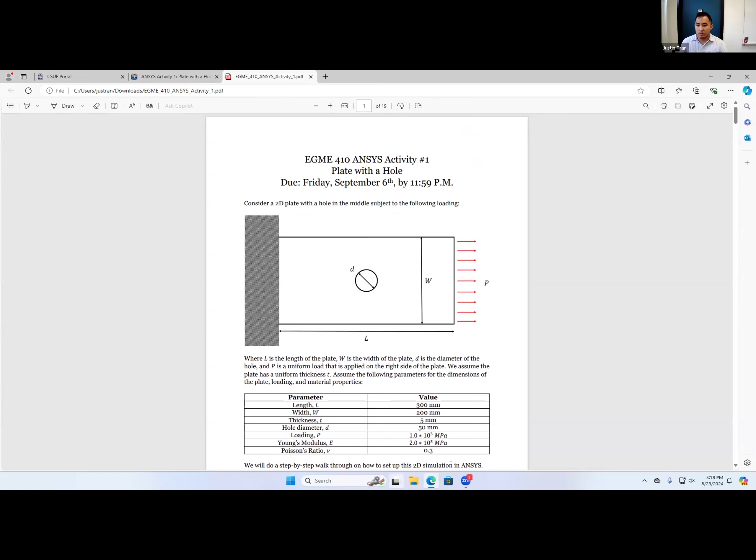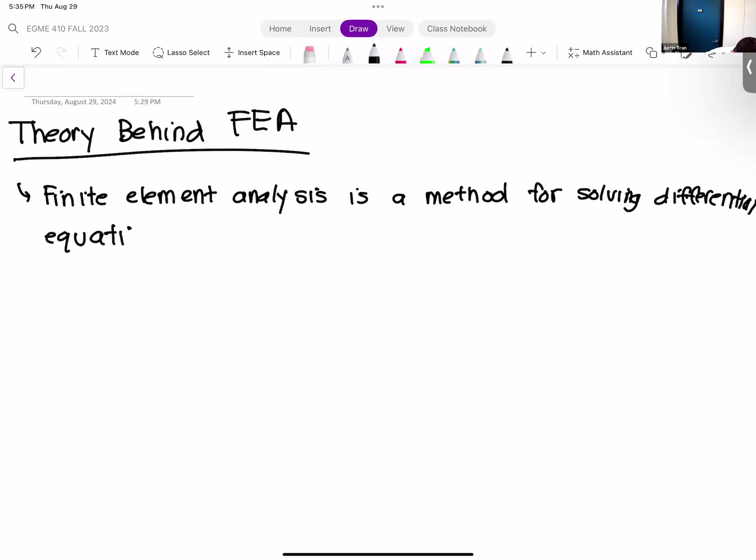If you take a course that's more in depth on the theory of finite elements, you're going to be talking about differential equations a lot. And the reason we're so interested in differential equations is, well, first let's define one. A differential equation is some kind of equation that relates the derivatives of certain quantities.

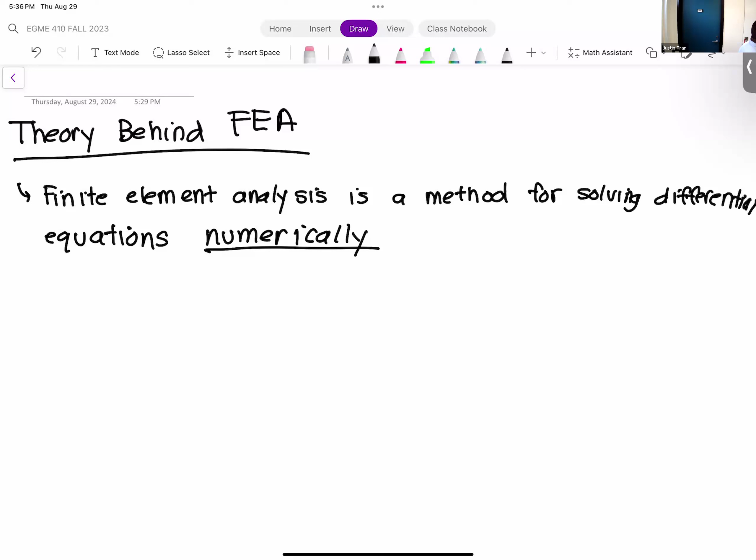It turns out that, based on the development of science and math throughout history, a lot of physical phenomena have their most reliable models as differential equations. So we talked about a few examples on Tuesday, things like the fluid mechanics equations, the heat equation. Things like that.

And the reason finite elements is able to do this is that it's able to take a differential equation, which is normally a very difficult type of equation to solve, and turn that differential equation into an algebraic problem.

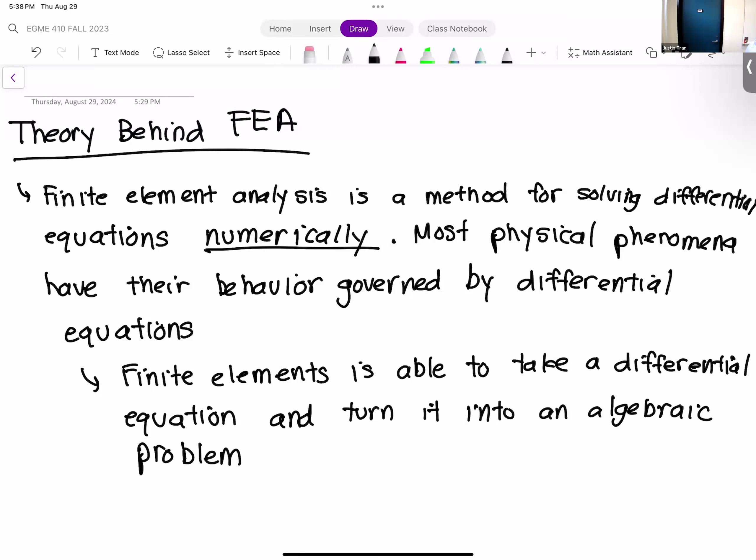Which, by itself, you'd say doesn't seem like that much of an improvement, right? You're taking one really hard math problem and turning it into another really hard math problem. So it kind of just seems like we're doing things for fun, right? But the thing with algebra and algebraic problems is that computers are actually really good at solving algebraic problems.

And so it's fascinating actually. If you look at the historical development of FEA, finite elements was actually developed long before the age of computers, right? It was developed by mathematicians as a way to take differential equations and put them in algebraic form. When it was first proposed, people almost scoffed at it.

It's like, this isn't helpful. You turned one math problem into another, big whoop, right? It wasn't really until computers started getting developed and showing that they were actually really good at solving these algebraic problems that finite elements started to gain traction from there.

And then one thing led to another, and programming became a big thing, and development of finite element codes became a thing. And now we have all these big companies like ANSYS selling their finite element software to people.

And so, because of this development, finite elements has become a really big part, a really important part of just engineering analysis and engineering design in general.

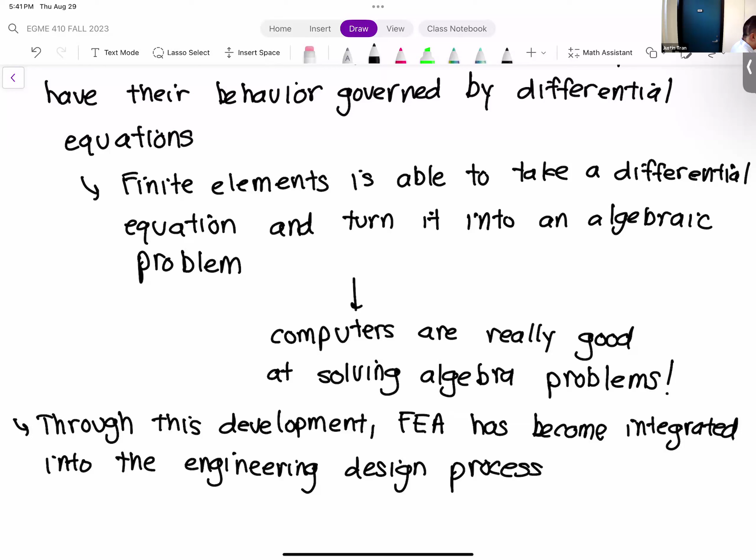And so the way that we obtain finite element results from a physical system kind of follows a particular flow chart, or it follows a particular model. So usually, when we are working with engineering, we're going to start with some physical engineering system.

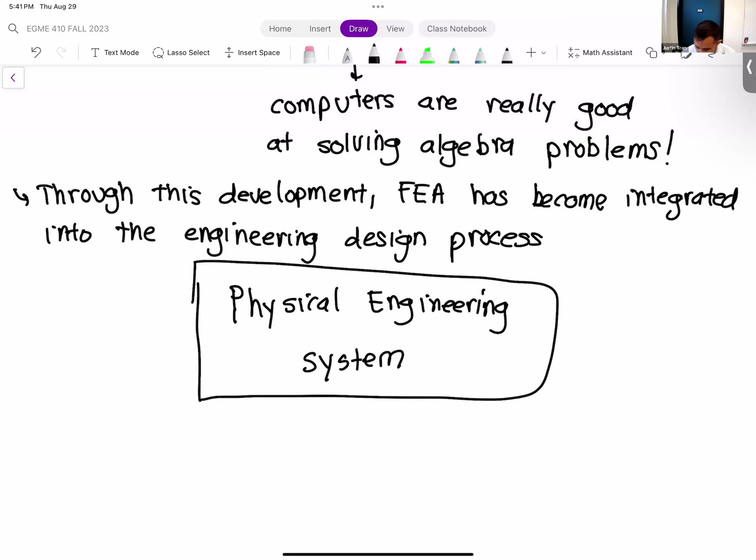Whether this be like a car or a building, usually it's something that you're in charge of designing as an engineer. This physical engineering system has its own governing equations, and the governing equations are going to be the differential equations that are used to model its behavior.

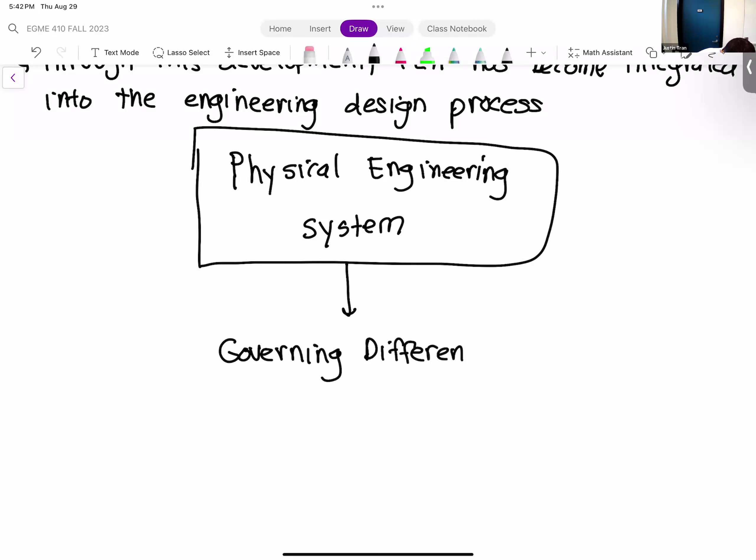And so at this point, if you were really good at differential equations, or maybe you were working with a very simplified system, you could solve these differential equations outright. Most of the time, we're not really working in those situations. We have either a complicated geometry or complicated boundary conditions, some kind of complexity. And so we have to work with this.

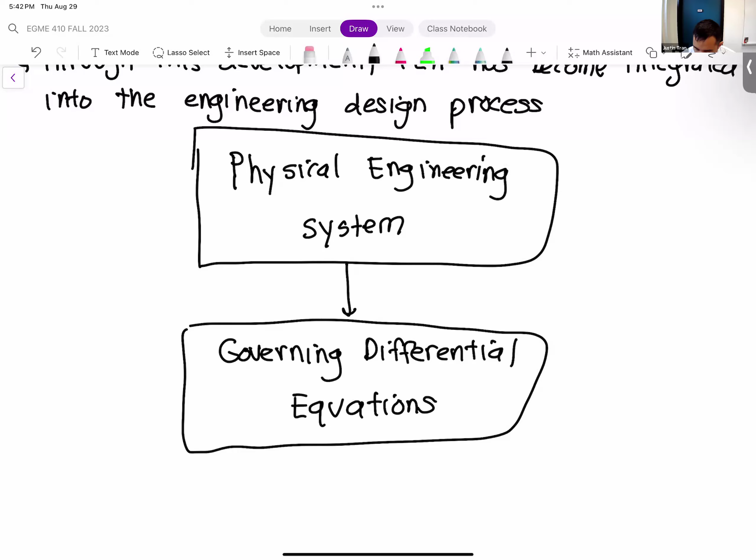And so, from here, this is where FEA takes place. Through FEA, those governing differential equations are often transformed into an algebraic system of equations.

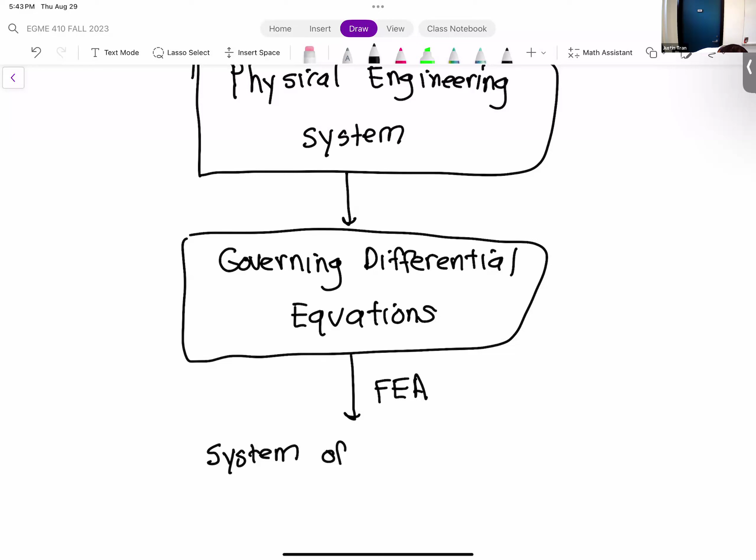A system of algebraic equations, these are usually linear equations. An equation of, what you're probably most familiar with solving is maybe 5 equations, 5 unknowns. That's something you can typically solve by hand. When you perform FEA and you find these systems of equations, they're usually much more massive than you're accustomed to. These systems could be anywhere between maybe 100,000 equations, 100,000 unknowns, maybe millions of equations, millions of unknowns. So even though it's a system of algebraic equations, it's beyond the scope of what you can solve by hand, unless you had a ton of time on your hands. The only real way to solve this very large system of equations is to use a computer.

And so through this computer, we have the solution to the system of equations, which through our FEA is also the solution to our governing differential equations.

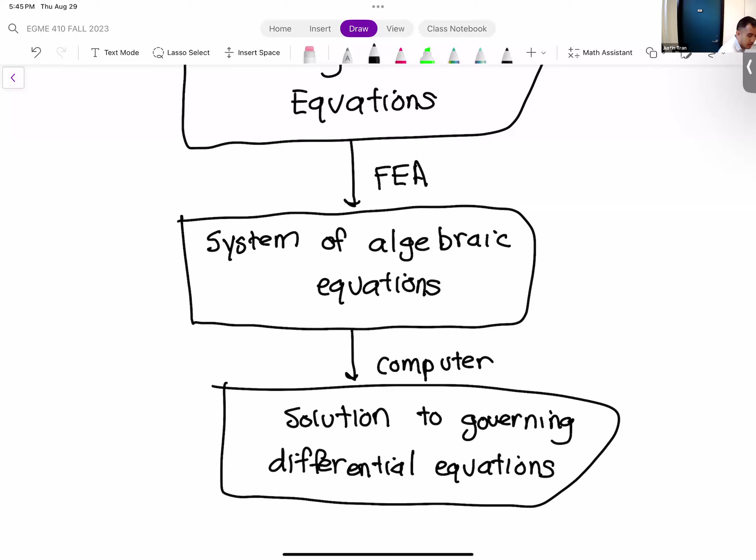Usually at this point, the solutions are in some kind of raw form, some kind of vector form that's not really interpretable by humans at this point. So there's some degree of post-processing that has to occur to make sure you can display the variables cleanly. This next part is post-processing, which again is handled in the computer, usually handled by the software. So ANSYS does this automatically for you.

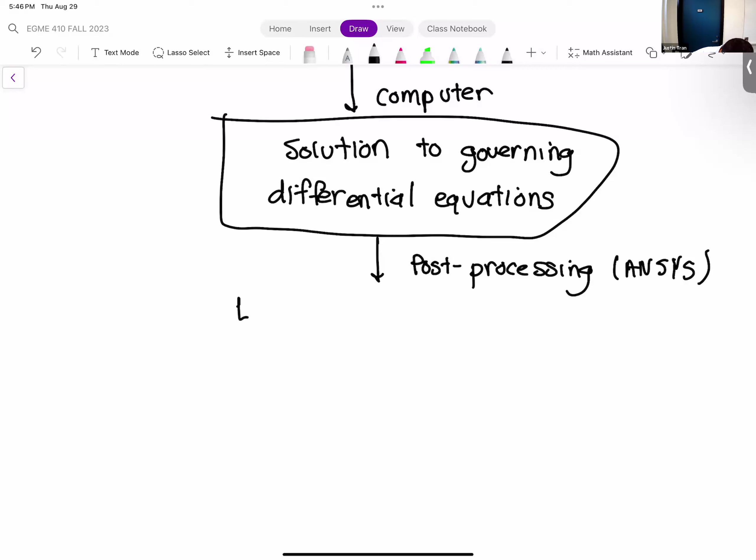And so from here, you usually obtain what I call the engineering results of interest. And then usually based on those engineering results, you can use those as part of your design.

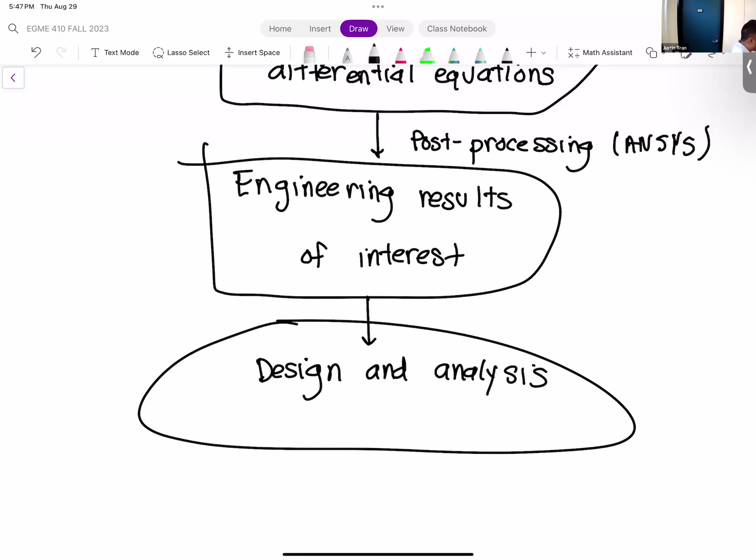And that's ultimately the goal of FEA, or at least modern FEA. So in modern FEA, for you guys as typically users of the FEA software, this is usually the flow chart or the logic that you're going to follow. Granted, a lot of these things are handled by the software now. Finite element software has advanced a lot over the last 10, 15 years. So ANSYS kind of handles this all on the back end without you really noticing anything.

But this is just a peek of what's going on behind the curtain. From your perspective as a user, ANSYS—and this would have a lot more context if we could use ANSYS today—but you're just inputting a part, inputting the boundary conditions, and getting the results from there. But there's a lot of math and processing that takes place behind the scenes. This gives you a little bit of a preview of what that process actually is.

Any questions on this so far?

For this class, we're mostly going to be focusing on structures, so we're going to be doing structural analysis, stress analysis, applying forces, pressures, solving things like deformations. But just know that any phenomenon governed by a differential equation, you can use FEA to solve. That includes thermal simulations, fluid simulations—those are probably the three most common: structures, thermals, and fluids. Electromagnetism to a certain degree too. But anything governed by differential equations, you can solve with FEA.

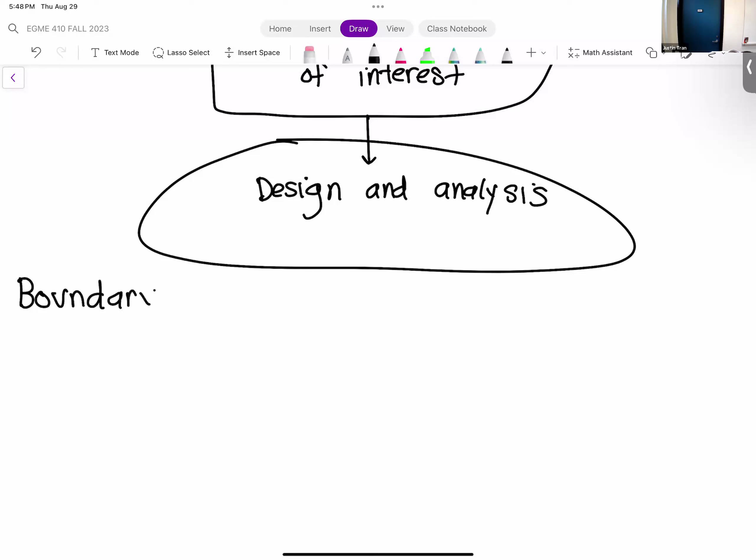Okay, so the next thing I want to go over is the concept of what I call a boundary value problem. A boundary value problem is not something unique to FEA, but it's oftentimes a really good starting point for an FEA analysis, because everything you have to define for a boundary value problem are things you have to define for a finite element problem as well. So there's a lot of overlap between them. And if you start to think about your engineering analysis and engineering design as boundary value problems, it helps get you in the right mindset of how to set this up properly as an FEA simulation.

And so it's a good starting point for any FEA simulation. It's also a great starting point for any analysis. Any kind of situation where you want to find out more information about it or predict its behavior—basically the goal of most engineering analysis—you're going to form a boundary value problem to solve it.

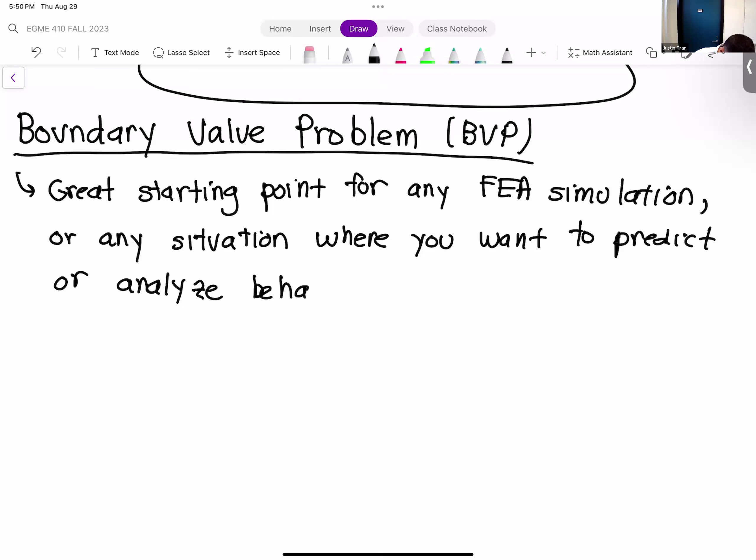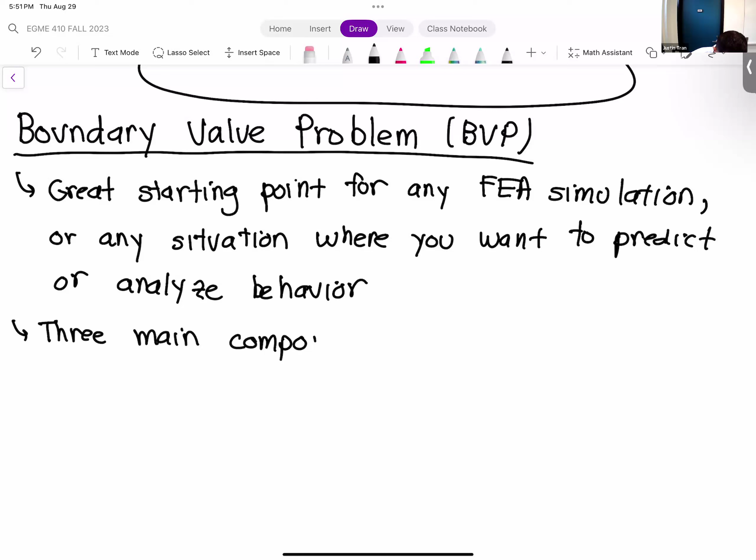Okay, so there are three main components to a boundary value problem. Part one, or part A, is the domain. The domain, in more plain speak, represents the geometry of your analysis—it's what you're analyzing. In more formal terms, it defines the boundaries, or defines where and to what extent we want to solve our governing equations.

So that's the first thing you have to define with the boundary value problem. It's also the first thing we define for an FEA simulation, finite element, okay? Again, this would be great if we could do our ANSYS activity, but almost the first thing you do when you run an ANSYS simulation is define the CAD model. You either import a CAD model or create one. You need some kind of geometry as a starting point.

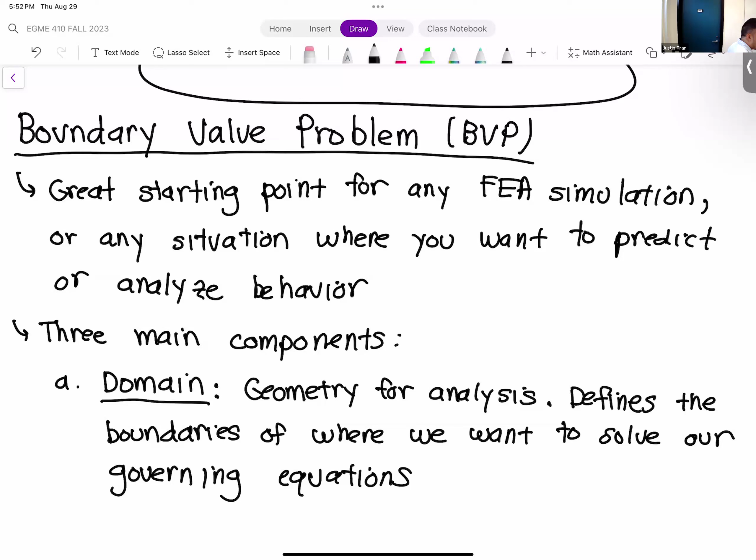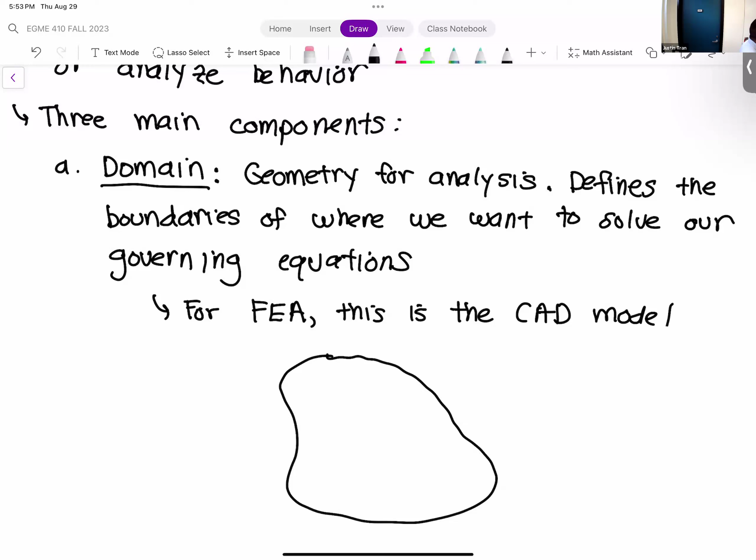So some kind of geometry that you created in SolidWorks, or maybe within ANSYS itself. That is the domain. For our purposes, just so you can have a visualization, I'm going to draw a domain. The domain is going to look just like an arbitrary potato.

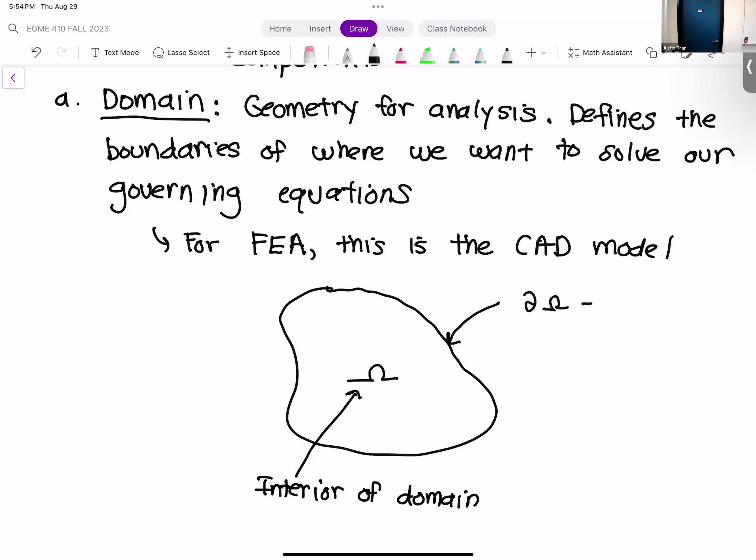So that is our domain, or at least the abstraction, some abstract art of an engineering domain, okay? Usually our domain is broken up into two regions. The interior of the domain we usually specify with the symbol omega - think of the fleshy white parts of the potato that are on the inside. And then the other region is the boundary, or the thing that encompasses the domain, which we give the symbol delta omega - that's like the skin of the potato.

You guys have the downside of being the last class I have to teach before dinner, so you're going to see a lot of food-based examples because I'm thinking about getting In-N-Out with my buddies today. I'm thinking about French fries, double doubles, and protein style - no, full, give me the carbs, give me the bread.

Okay, so defining the domain kind of seems like an obvious thing. When you're working with ANSYS for a while, it's kind of the first thing you do. Sometimes you don't really think about it when you get to FEA, but it's important, and it's important to define the domain, and for us most important to get these labels, that omega, delta omega. So it's always kind of the first.

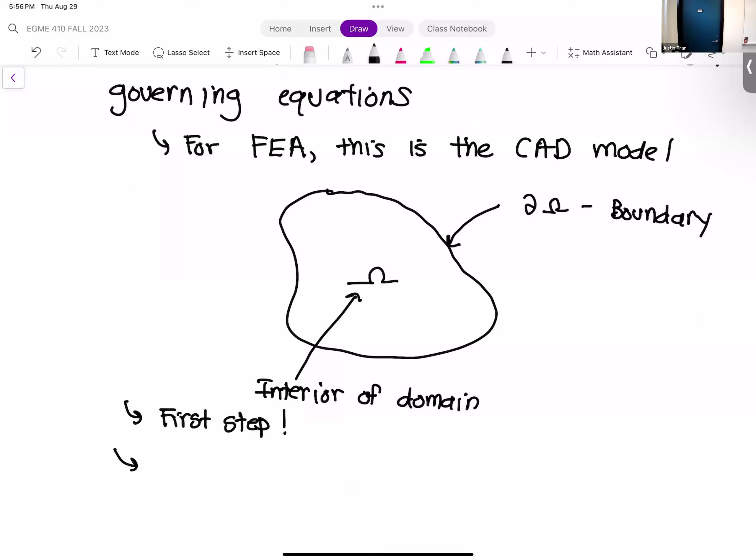The other thing that's not so trivial with the domain is thinking about what actually do I want to model - what do I actually want to include in my FEA simulation? That's actually a really important question to ask because, remember the goals of an FEA analysis - usually when performing FEA analysis, you want to find out, or predict, the behavior of a certain region in your system.

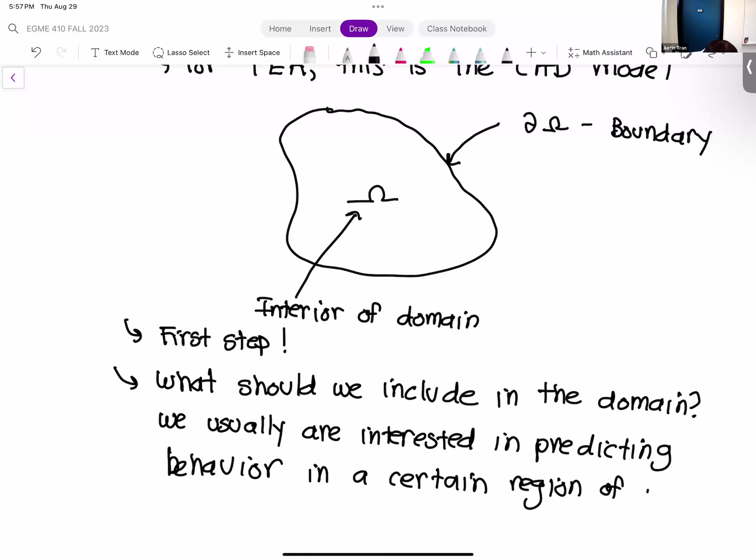So the most common case we're going to do in this class is failure analysis. Basically, we're going to simulate the structure of a certain part, expose it to certain constraints and forces, and see if the part's going to break or not. That's pretty common - if you're designing the structural parts of any kind of device or vehicle, that's what you're interested in. But if you've ever designed something or seen something break, things usually break in the same places. If you place a lot of stress on something, it's going to break at certain points. So if you're really interested in just the parts that are going to break, maybe you just want to simulate those parts and not all the others.

I'll never forget this, it occurred a few years ago so I can talk about it. For someone's final project in this class, they wanted to do a finite element analysis of a barbell in a weight room. He was interested in seeing how much weight he could put on this barbell before it collapses on itself. So he worked really hard on this and created a SolidWorks model of his entire weight room setup - the bench, the barbell, the weights, and all that stuff. And I'm like, this is beautiful, it looks great.

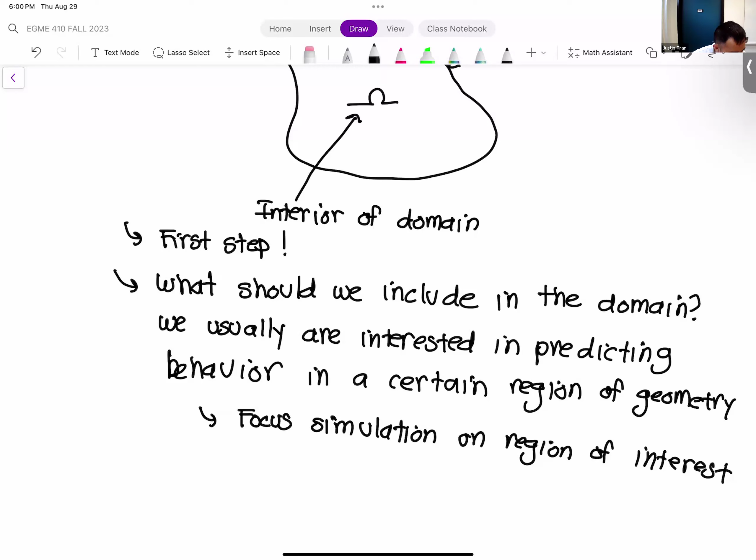So the next part of the boundary value problem is the governing equations. We've already talked about the governing equations quite a bit today, but the governing equations are the differential equations that predict the behavior of the system. When I say behavior, what I really mean is the differential equation tells us how our physical system is going to respond or react when external stimuli are applied to it.

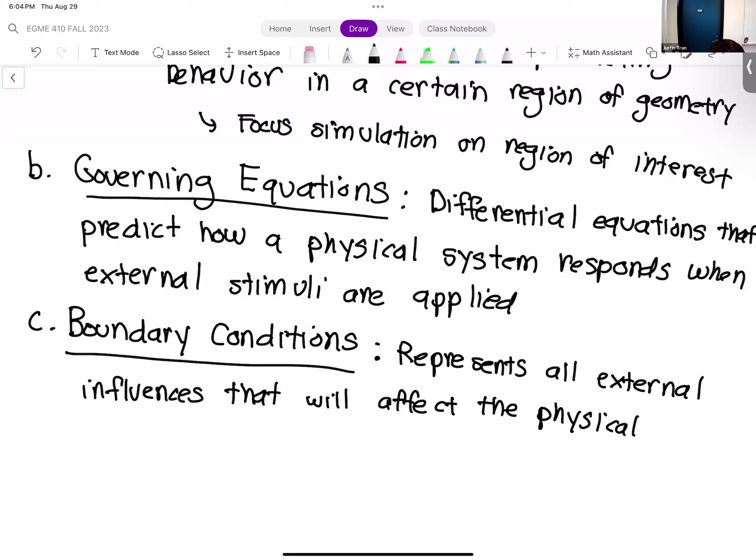Some of the more common boundary conditions we're going to be working with in this class are things like forces.

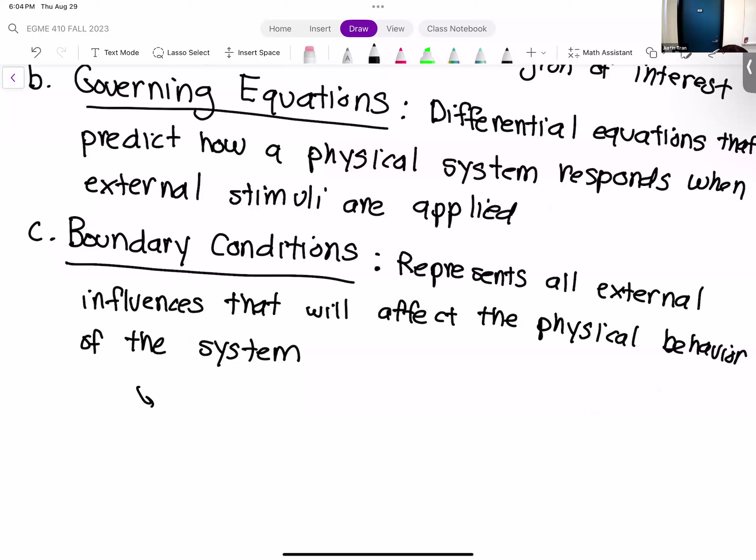Things like constraints - places where our geometry is going to be fixed, not going to move. Sometimes the constraints are often called supports. So fixed constraints, fixed supports, same kind of deal.

Basically, anything that we're not explicitly physically modeling in the domain, but is going to exert some kind of influence on our system.

So those are the three parts of the boundary value problem. We have our domain, we have our governing equations that define how our domain is going to respond to certain stimuli, and then we have the boundary conditions, which are those stimuli themselves.

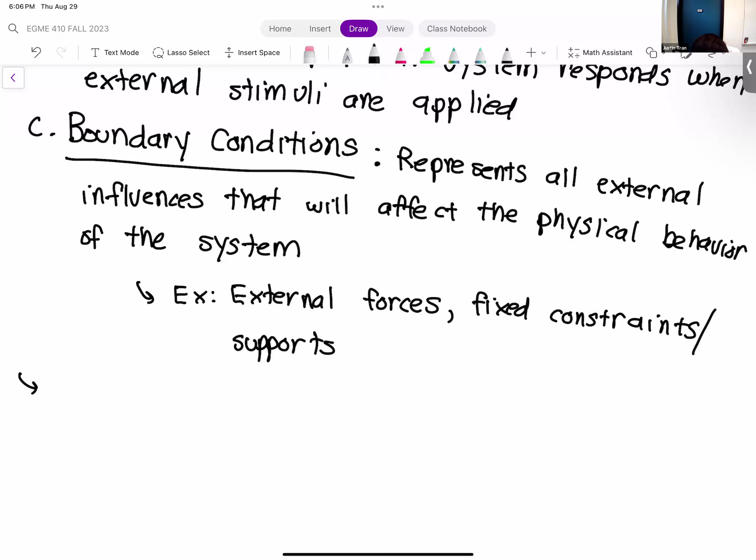So to visualize this whole process, we can draw a figure. Let's say that we start with an arbitrary potato, and I'm going to go with the example of structural mechanics, so you'll see this physical potato deform.

Our potato here is our domain. We have an omega branded potato. Of course, our potato has our governing equations that are going to define how the interior responds.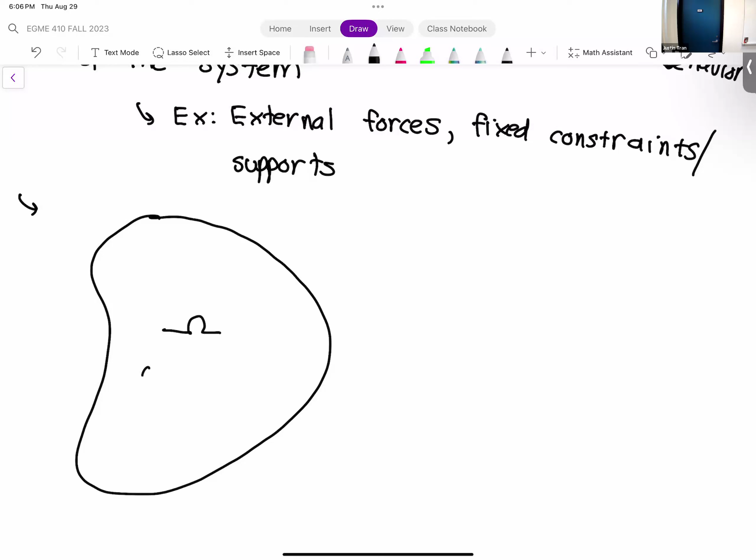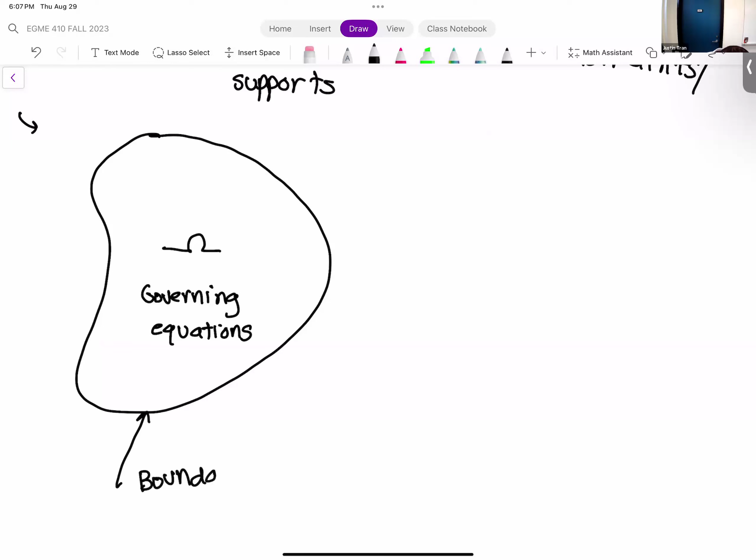And then to this potato, we're going to have some external forces. Those external forces are going to be like boundary conditions. So let's say that we have a boundary condition like this. Maybe we have a fixed support here. Our potato is fixed to the wall, or it's impacting a wall right there. Okay, so this is another boundary condition.

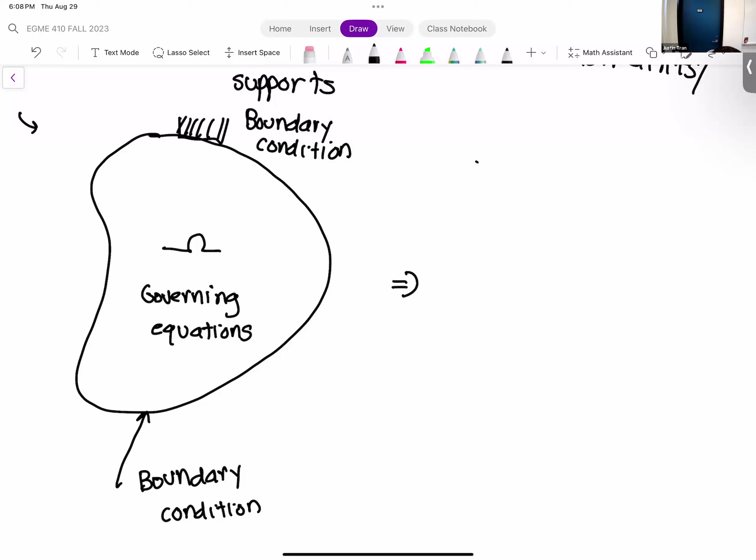So this is kind of what your simulation setup would look like. You would have your original domain. At this point, it would be discretized, it would be meshed, then you would apply boundary conditions. And then when you run the simulation, we're going to get a prediction of how this physical domain is going to respond to that external stimulus. So let's say we ran the simulation, and let's say that we got a result that kind of looks like this.

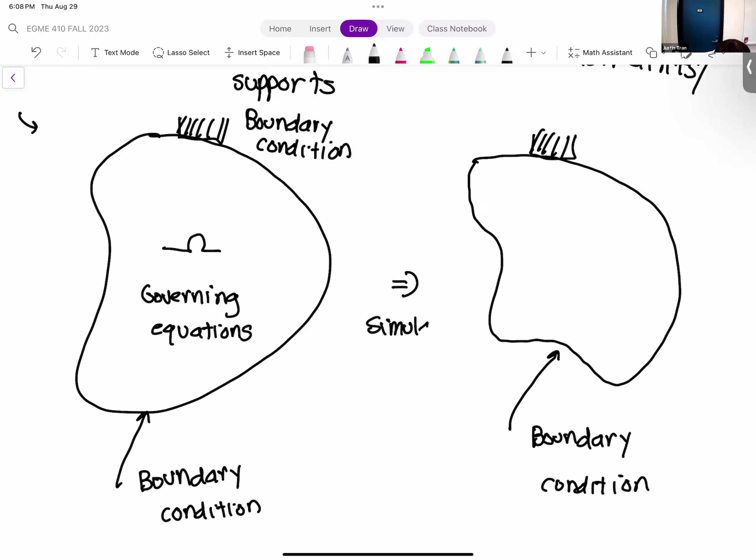So this is our deformed domain, as opposed to our undeformed. On the left, you can kind of see the setup for the boundary value problem. So that's everything that we had to define. We define our domain, we define our governing equations, our boundary conditions. These are all things that you're going to input into ANSYS as inputs. And then after you run the simulation in ANSYS, what you're going to see as a result is on the right, which is the response.

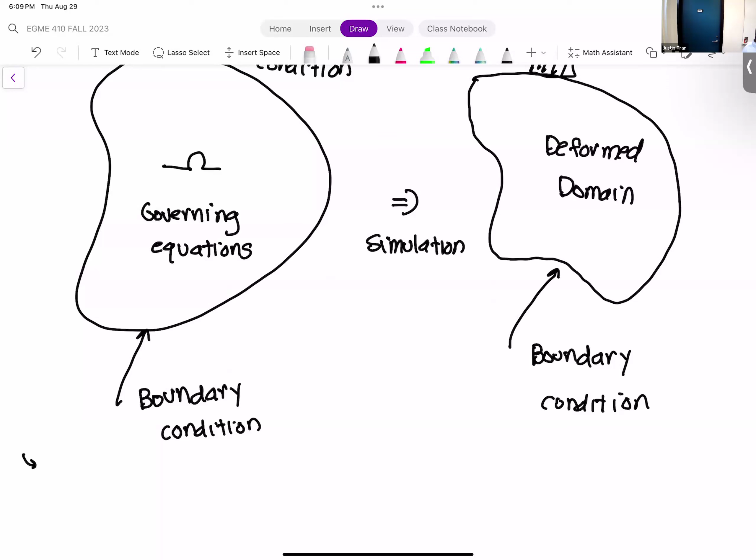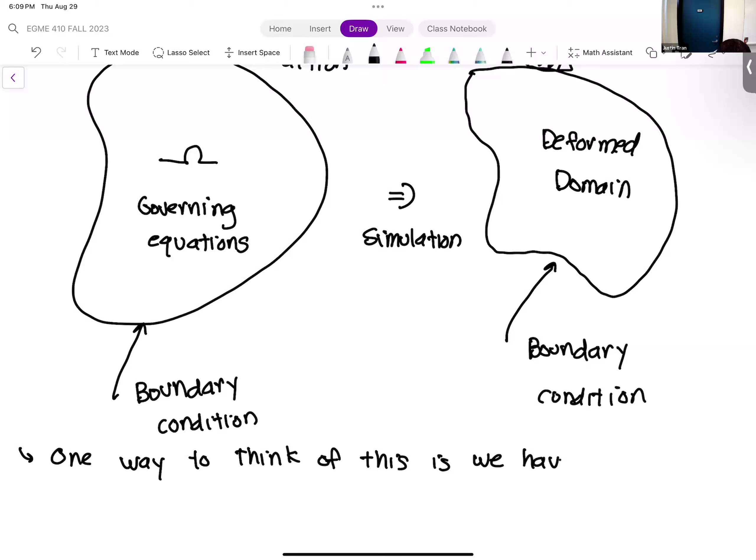If I were to describe this with words, one way to think of a boundary value problem or an FEA problem is: we're going to define a physical system that behaves according to its governing equations. We're going to apply some external stimulus, and we want to see how the system is going to respond to that stimulus. A little long-winded, but that's one sentence that summarizes the whole idea of a boundary value problem and the mindset that you have for finite element simulations as well.

So with finite elements, we have our system, often defined by a CAD model. It has governing equations depending on the type of material it's made out of, the type of structure it is, and we want to see what's going to happen when we apply forces to it. When you say it like that, it definitely sounds simpler than it is, but it's always important to keep all of these things in mind when you're defining an FEA. It really helps keep things focused.

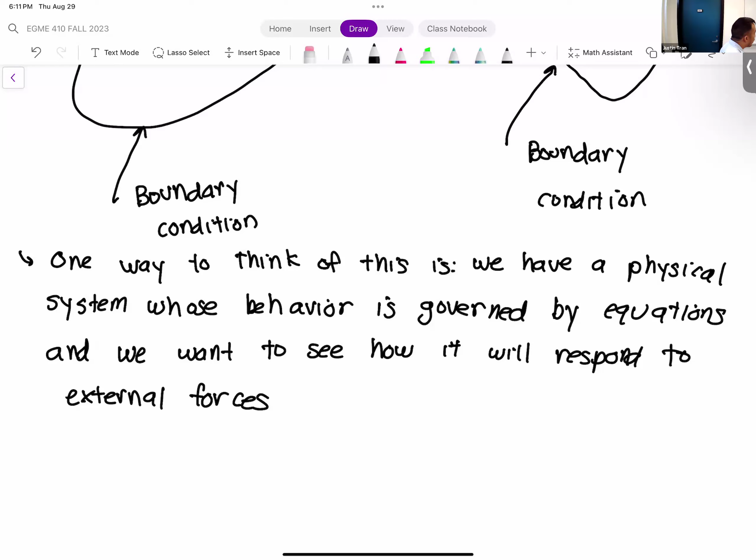All right, so that's the basic idea with FEA, and ANSYS is designed from the ground up to follow the same process of defining your domain, defining your equations, defining the boundary conditions, and then when you run the simulation, you predict what's going to happen. Okay, so the next thing I want to talk about are the types of equations or the types of physics that you can solve in FEA, or the most common ones.

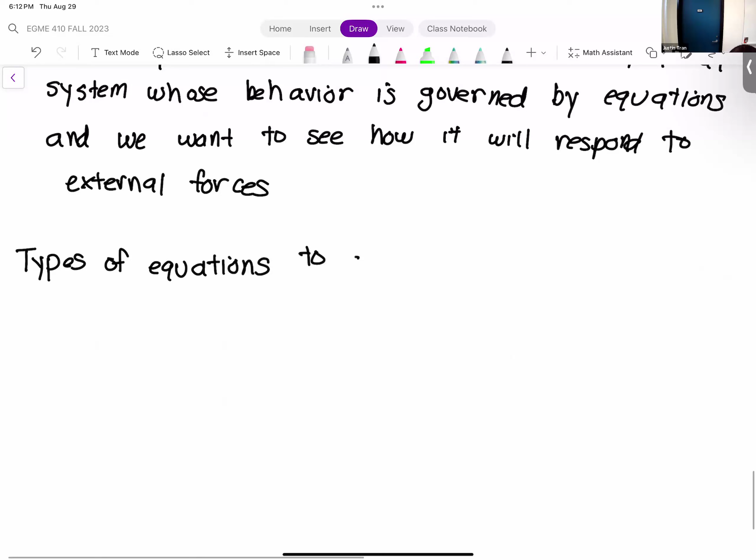I'd say these are the three most common categories, but there are some variations in these as well. So the number one type of equation that we're going to solve, this is the one we're going to see the most common in this class, is called linear elasticity.

Linear elasticity is a structural type equation, so you're going to be inputting things like forces and pressures and fixed constraints, and you're going to be solving for things like deformations and structural stresses. So linear elasticity is an equation that determines how objects deform in response to physical forces.

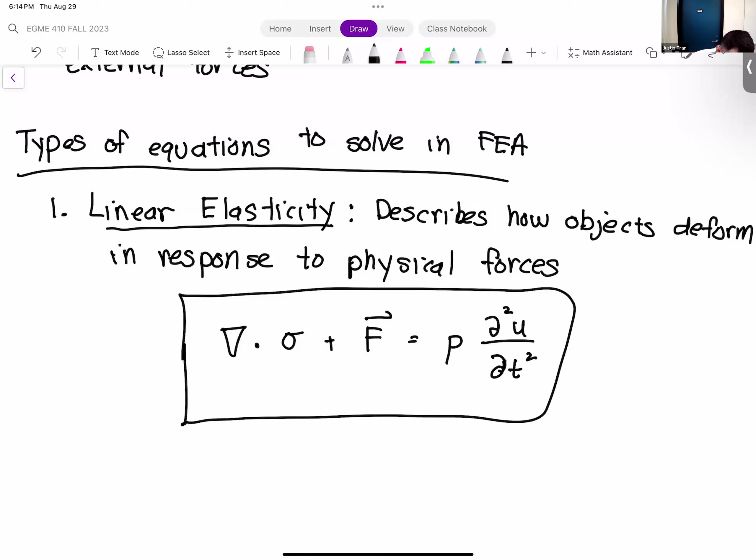The mathematical form of this differential equation is basically just a generalization of Newton's second law, and it looks something like this: the divergence of the Cauchy stress plus the force vector is equal to rho times partial squared u over partial t squared, where the main variable of interest here is u, the displacement of our physical system. So that's the differential equation essentially that we're solving with elasticity.

So the main interesting thing about linear elasticity is the form of the Cauchy stress, or the sigma term. Under linear elasticity, what we're assuming is that there is a linear relationship between the stress in the system and the strain.

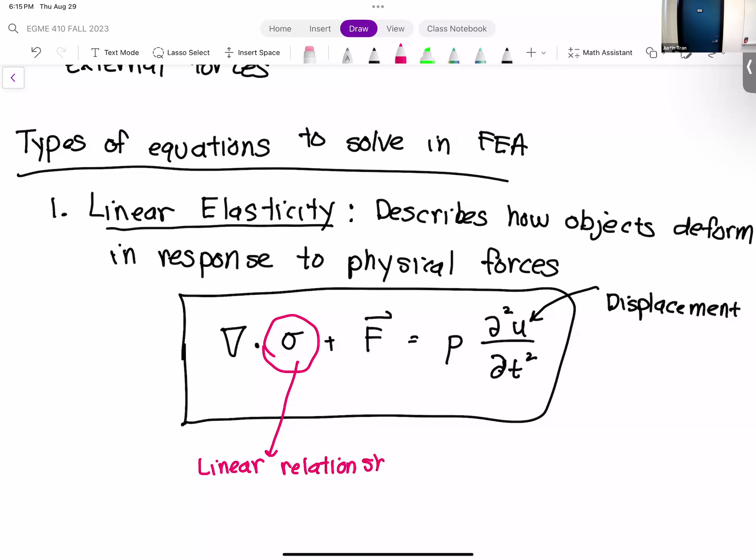This is probably a formula that you should hopefully be very familiar with, which is sigma, stress, is equal to Young's modulus E multiplied by epsilon, the strain. In other words, that's our familiar Hooke's law, which states that this relationship is linear, and the coefficient of proportionality here, or the linear coefficient, is E, the Young's modulus.

Linear elasticity is probably the simplest structural equation that you can solve for. It's also the most intuitive. Again, this would have been great if we could do our ANSYS activity. Generally speaking, with linear elasticity, there is a linear relationship between the amount of force you apply and the amount of deformation or displacement you get.

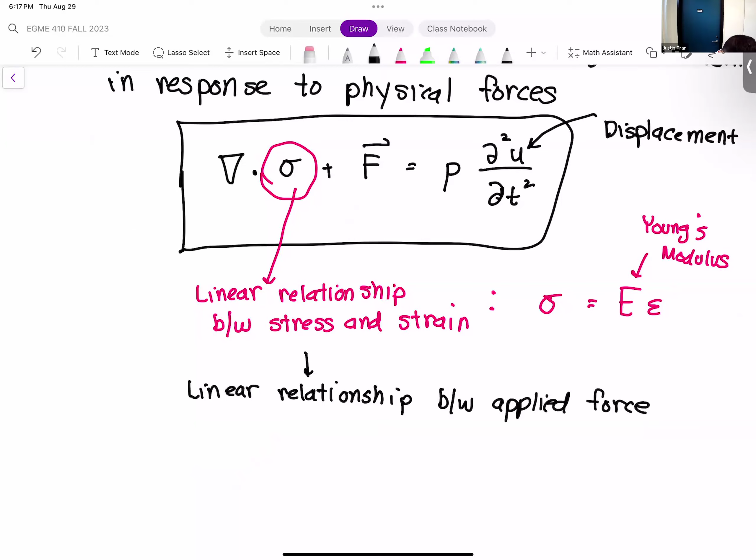If you have a certain simulation running under linear elasticity, and you've applied a certain amount of load, if you were to double that load, generally what you expect with linear elasticity is that the amount of deformation should also double. So double the load, double the deformation, a very strictly linear relationship. Of course, linear elasticity does have its limitations.

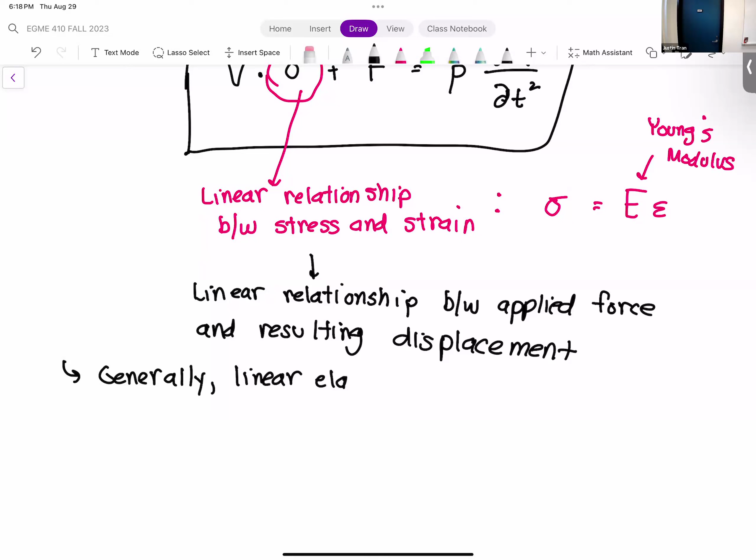Generally speaking, linear elasticity is only valid for relatively small displacements. So if the amount of force you're applying onto the system isn't that high in magnitude, and the displacements you're getting are maybe 1 to 5%, probably less than that of the total dimension of the structure, linear elasticity is pretty reliable here.

Because if you think of the typical stress-strain curve, on the vertical axis we have stress, on the horizontal axis we have strain. Hopefully you guys remember this from solid mechanics. Typically these curves look something like this, where there is an initial region that is a straight line, valid for relatively small strains. But after a certain point, this curve starts to deviate from that linear relationship. It starts to look something like that.

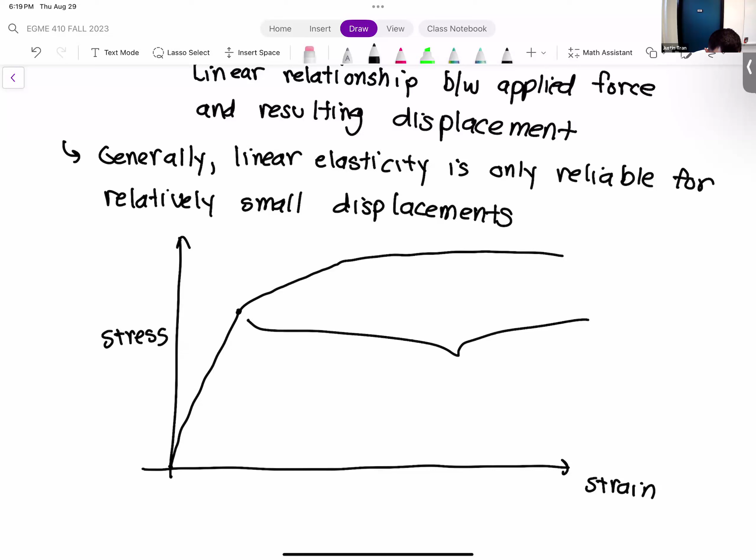Remember, this region of the stress-strain curve is called plastic deformation. It's when deformation or strain really starts to take off, you get a lot more deformation for the amount of stress that you apply. So linear elasticity basically makes the assumption that you're staying in this region right here.

One other thing I'll mention before we move on to the thermal equations is the primary solution. I kind of hinted at it when we looked at the equation up here, but every differential equation has what I call its primary variable, the first thing it solves. It's a little hard to tell when you're just using ANSYS what the primary variable is, because ANSYS kind of treats all the outputs the same. But when you're solving a differential equation, there's always a primary variable that you solve for first, and from that primary variable you can compute a bunch of other things.

So for linear elasticity and for structural simulations in general, the primary variable is the displacement, or sometimes we call it the deformations. In the computer, this is the first thing it solves for. If you're solving a static structural simulation, the first thing ANSYS is going to solve for is the displacement. You have your physical system, you apply constraints, you apply loads. The first thing it needs to solve for is how much the structure is going to displace and deform in response to those loads.

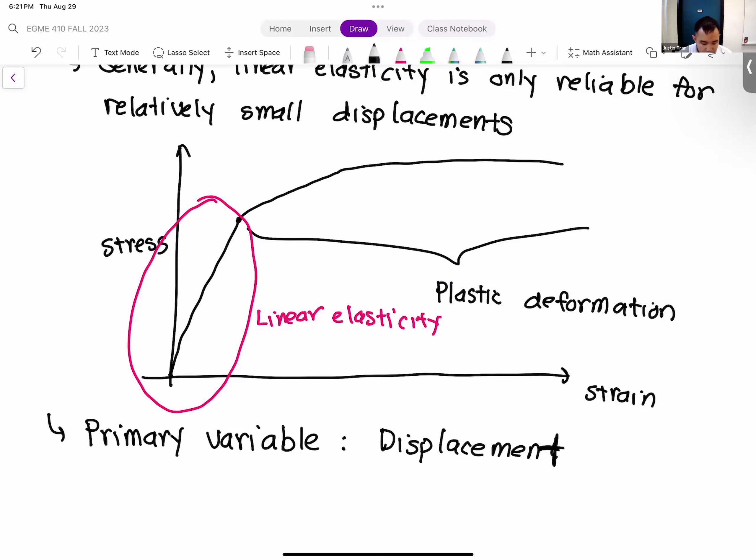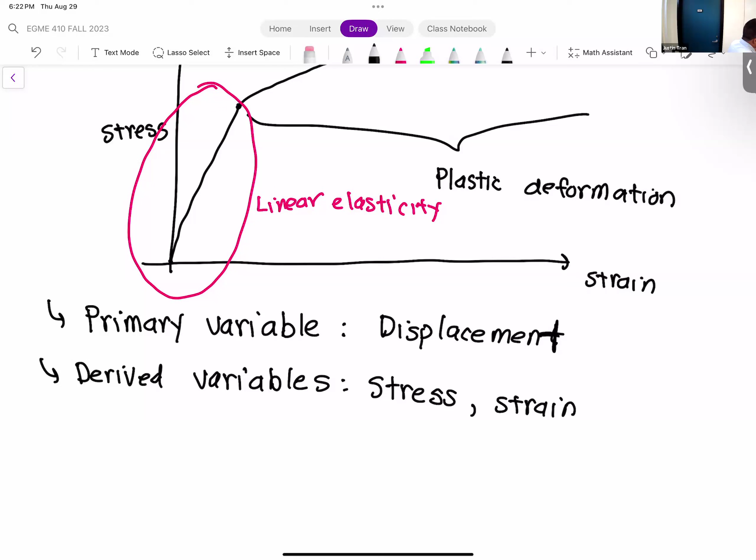And then from the primary variable, from the primary solution, ANSYS is then able to compute what are called derived variables or derived solutions. Some common derived variables for structural simulations will be things like structural stress. Strain is kind of in this boat as well. Under that token, ANSYS actually also lets you compute things like factor of safety. For more specialized simulations, if you're doing columns or something like that, you can compute buckling, stuff like that.

But the first thing that's solved for first is always the displacement. This is an important distinction to know when you're working with FEA, because in general, when you're talking about accuracy and reliability, usually your primary variable is going to have the highest accuracy. What I mean by that is that when you solve a structural simulation for displacement, you can probably have the most confidence that your displacement is the most correct. And because the derived variables are computed from the primary one, these generally have lower accuracy.

Later on in the class, we're going to talk about mesh convergence tests. Throughout the class, we'll see that the accuracy of your simulation depends heavily on the mesh density, or how many elements you have. The primary variables in your simulations, like displacements, temperatures, or velocity for fluids, are always going to converge first, so you'll get a reliable solution with fewer elements for those. Derived variables converge a lot more slowly, so that's something to keep in mind. Most of the time we're interested in things like stresses and factor of safety, so you want to be really careful with your mesh convergence.

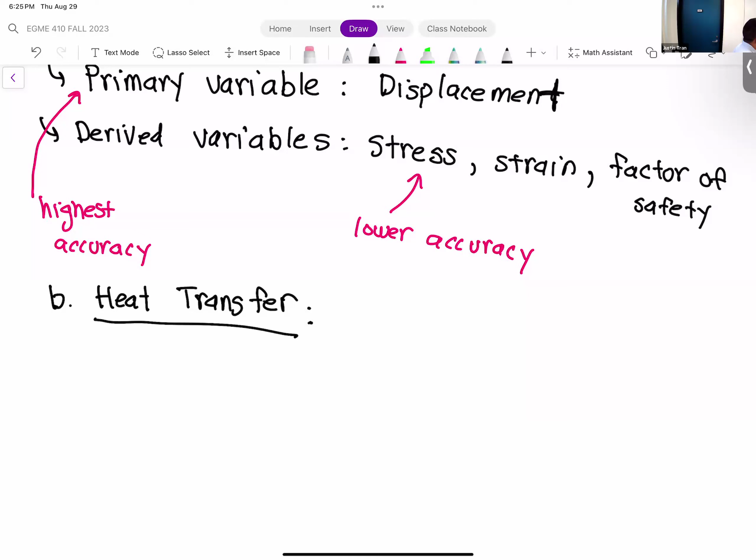Heat transfer, you guys have all taken heat transfer, so there's not much to say. But in thermal simulations, what we're interested in is solving for usually the temperature distribution within a physical domain.

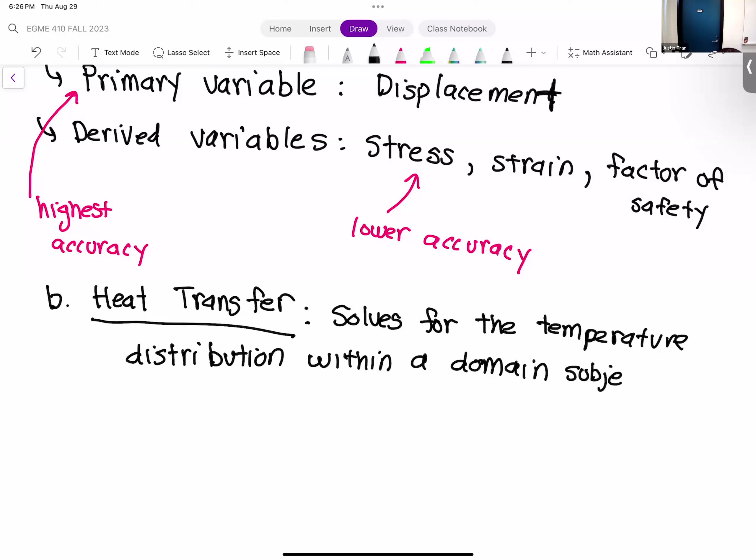Usually we're interested in this because we're subjecting our domain to some kind of thermal load. This could mean external heaters or external cooling, or maybe it's attached to something with a fixed temperature, and we're interested in seeing how this is going to affect the temperature throughout the model.

Sometimes this also includes things like friction. Last year, I think someone did a project on the braking system, either Formula or Baja, and they applied a thermal boundary condition based on the amount of friction, how much heat that's going to generate as the car comes to a stop.

Okay, so the governing equation for heat transfer is, of course, the heat equation.

I love the heat equation because it's one of the very few equations in science that's not named after some dude. For some reason, scientists are very narcissistic people, they name their equations after themselves, the Bernoulli equation, the Navier-Stokes equation, Reynolds number. It's great, they're immortalized, but if you tell a stranger what the Navier-Stokes equation is, they'd have no idea. But if you tell someone I'm solving the heat equation, it's clear what you're solving for: heat. So I love the heat equation, unless this person's name was actually Heat, I don't know. Maybe he is a narcissist, but at the very least, on first blush, it looks nice.

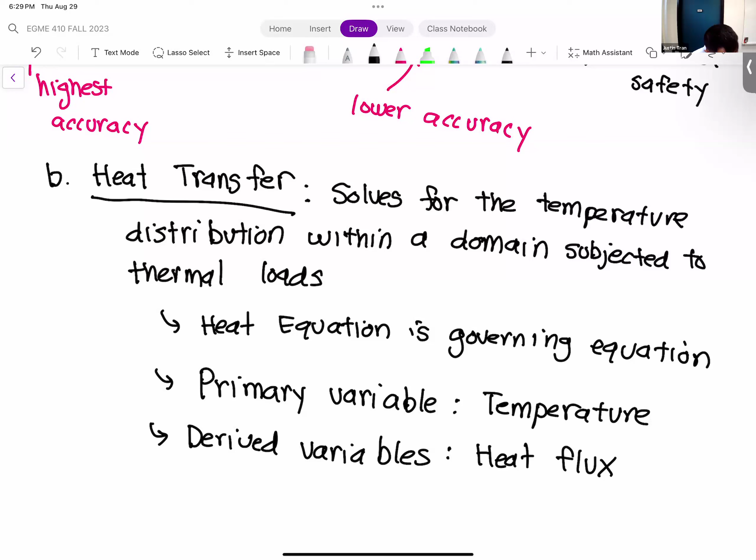All right, so that's heat transfer. The third one I'll go over, just because these are probably the three most common for mechanical engineers, is fluid flow. The fluid flow equations are going to solve for the velocity distribution of fluid flowing through a certain domain.

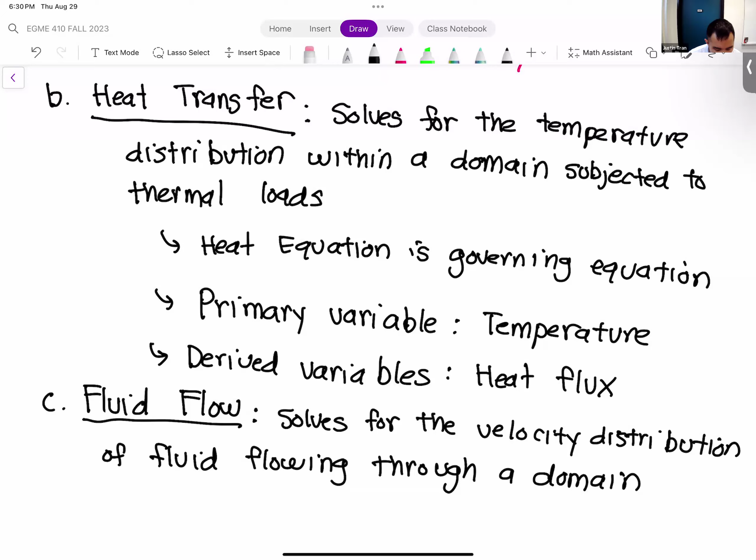Usually you need some kind of driving force to drive this fluid forward. The most common external force or boundary condition for fluid flow is some kind of pressure. Sometimes gravity plays a role, but usually it's driven by pressure.

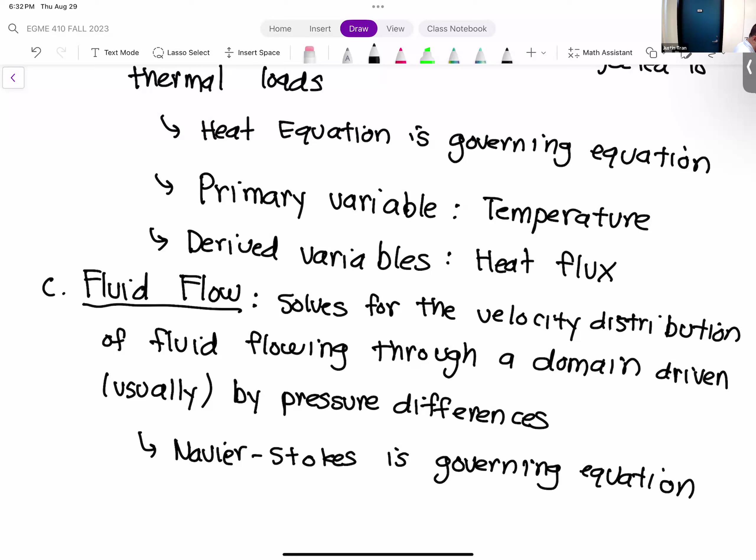Of course, the governing equations for fluid flow are the Navier-Stokes equations. They represent the conservation of mass and momentum in a fluid. The primary variable for fluid equations is velocity, and some derived variables.

These I'm quite familiar with because all my past research has been in CFD, so I've seen these before. These could be things like pressure. Sometimes you're interested in shear stresses, because as fluid flows past each other or past a solid object, it's going to exert some frictional shear. Maybe things like vorticity if you're into aerospace. Drag forces, lift forces, all kind of included in these.

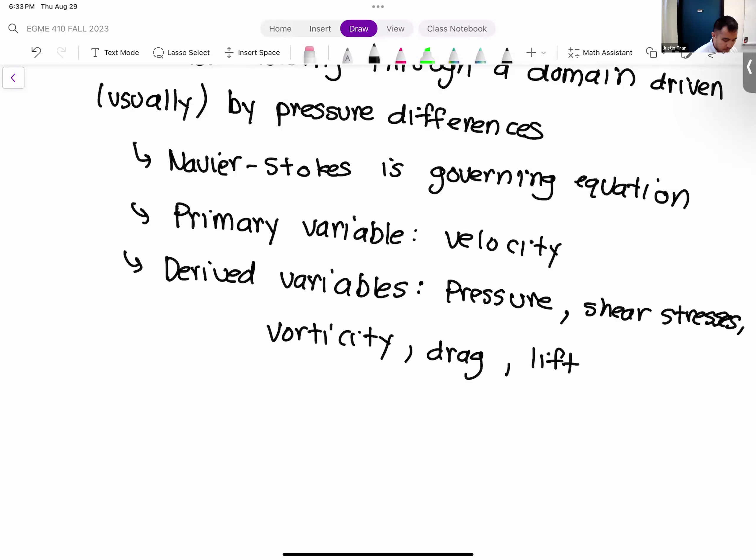So those are the three most common equations that we'll solve in FEA. Of course, FEA is not limited to these three things - it's able to solve for basically anything governed by a differential equation. But these are the three you're going to see the most as a mechanical engineer. Any questions on this?

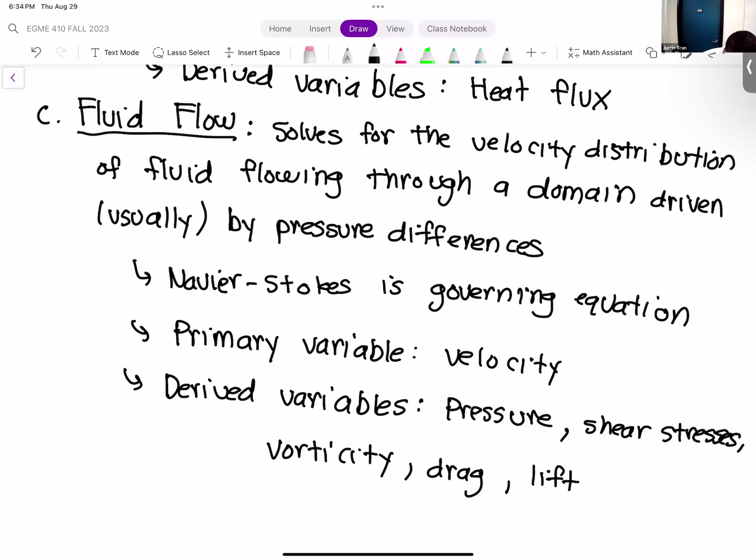One last thought I want to leave you with before we head out for today is the idea of a multi-physics simulation.

In the traditional way, and ANSYS is kind of set up this way too, you choose one kind of equation - either a structural equation, a thermal equation, or a fluid equation - and you're solving for just that type of equation. Those are called single physics type simulations. But in reality, these different equations, these different types of phenomena, are going to interact with each other and affect each other's solutions.

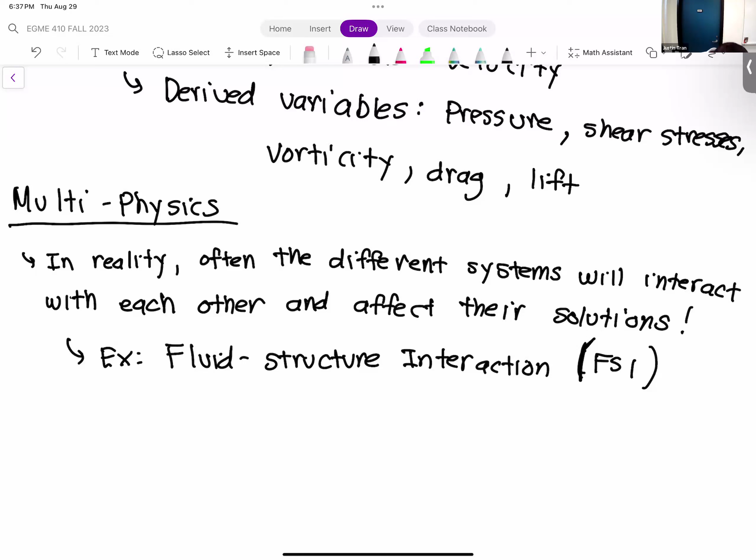We can think of a situation of blood flow, or it doesn't have to be blood - maybe fluid flow through a flexible tube. We have a tube here, we have fluid flowing through it, and we have some kind of internal pressure. We'll consider the pressure drop from the inlet to the outlet, P1, P2. That pressure difference is needed to drive the fluid forward. But that pressure is also going to exert a force on the vessel wall.

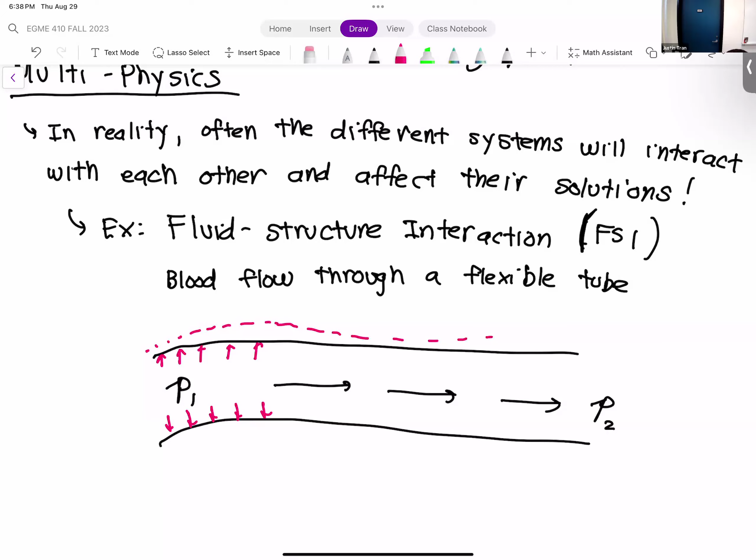That pressure is going to exert a force that radiates outward on the wall, and the wall, being a flexible, elastic structure, is going to respond to that. So as blood pumps through this tube, the tube is going to expand. There you have the interaction of a fluid force influencing and causing a structural deformation.

But it also goes the other way around, because what happens when you have a flexible tube filled with fluid and you suddenly pull it apart and expand it - you're going to create a vacuum. As the tube expands, it also has to pull some fluid towards it. So the structure expands, it pulls some fluid, and that's going to affect fluid flow. And what affects the fluid flow is going to affect the solid.

So what you have here is a true multi-physics situation where you can't just solve the fluids - if you solve just the fluid domain, you're going to miss out on all of the structural mechanics. And of course, you can't just solve the structural mechanics, you're going to miss out on the fluids. These two types of physics are very closely intertwined, and they need to be solved simultaneously in your simulation if you want accurate results.

ANSYS does have the ability to do multi-physics. Some people have done it for their final project, but that's just something to keep in mind. Any questions on this?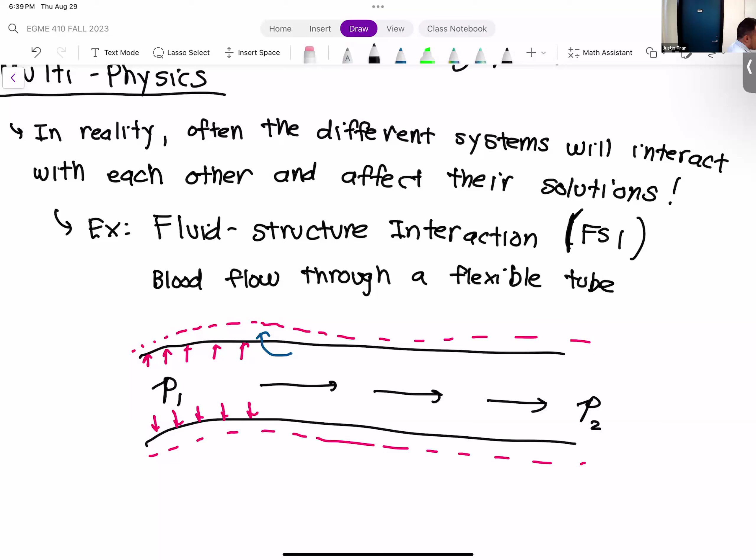Okay, one more example - I did mention this one earlier. This is a thermal structure interaction.

So let's look at a brake pad. When you brake on your car, you have your brake pads that kind of pinch the axle, and that causes eventually the wheels to stop with friction.

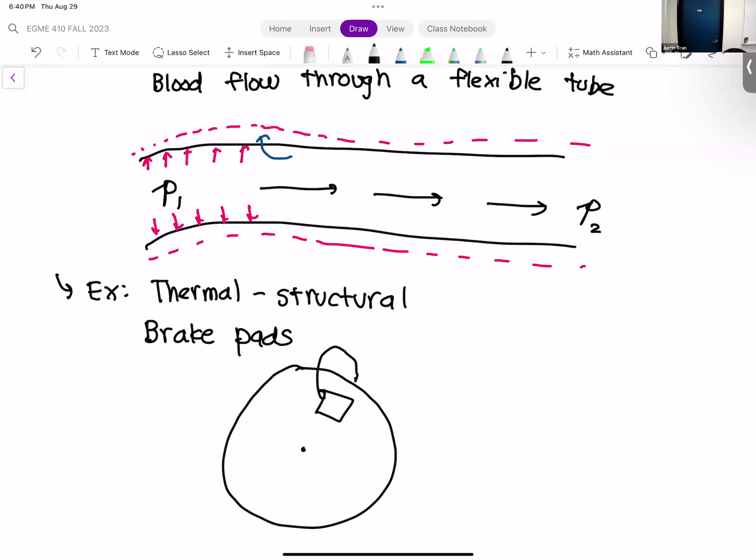We have a kind of spinning axle here, and then you have a brake pad that pinches it, maybe something like this. Normally this axle is spinning, this disc is spinning really fast. To slow it down, you pinch it at a certain point, and that friction force is going to cause it to stop. But because we're stopping this primarily through friction, it's going to produce a lot of heat.

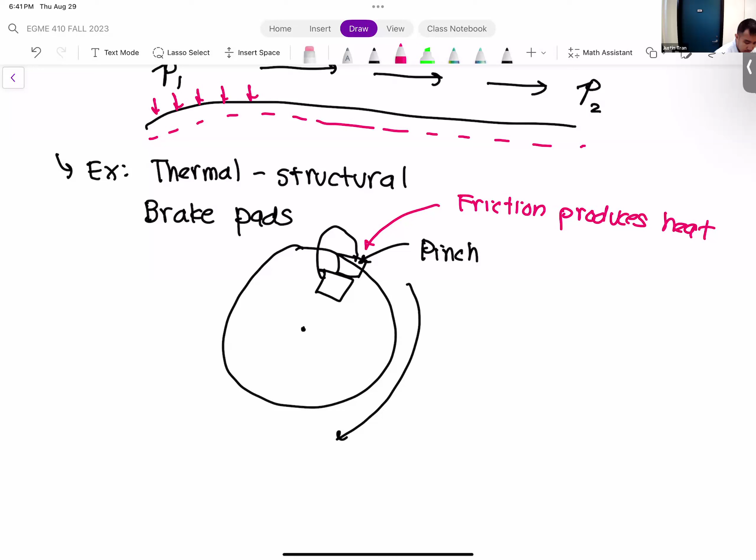And of course, that heat is going to heat up the axle, and it's going to heat up the brake pads. So this entire system here is going to heat up as the axle comes to a stop.

And what's fascinating about this, and this is fascinating for any kind of thermal simulation, is that often the material properties of the system depend on temperature. So as the entire system heats up, that's going to change its properties. It's going to change the values of the Young's modulus, the density, and the Poisson's ratio.

And so as the material gets softer, as the material properties drop, that's going to affect its structural response. Maybe if you pinch it too hard and it gets so hot, the whole thing just gets bent out of shape. So this is another situation where you have the structural component and the thermal component, and they're very closely intertwined with each other. You need to solve both at the same time to get the full picture of what's going on.

Multi-physics situations are possible, you can do them. For our activities, we're going to shy away from them, but I just want to let you know that they are possible, and you can set them up. Any questions on this?